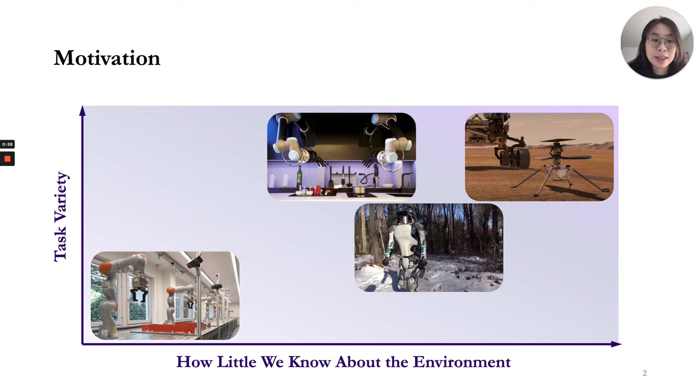Traditionally, modeling and control techniques have been used to solve robotics problems. They usually require us to derive a first principle model and then come up with a controller that has desirable theoretical properties. However, as the environment becomes less structured, it becomes increasingly hard to find an accurate model as well as designing a good controller.

Data-driven methods, on the other hand, seem to be a powerful alternative in this setting, as they usually make weak modeling assumptions. Moreover, they can also improve their performance as they collect more data.

However, it is still unrealistic to directly apply these data-driven methods into robotics problems due to a number of concerns. For example, it is hard to have any safety guarantees during learning and after learning. It requires a lot of data, the learned policy is hard to interpret, and the learned policy can often exploit the environment, such as the reward function.

In most of the previous work on learning robot policies, people often use fully connected neural networks to parameterize the mapping from state to action, namely the policy. On one hand, these fully connected neural networks are powerful because they are universal function approximators. However, this also means that they're extremely inefficient, both in terms of samples, parameters, etc.

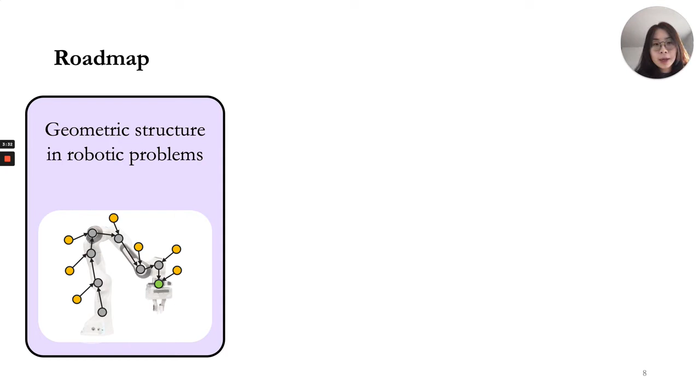In this talk, I will first talk about the geometric structure commonly existing in robotics problems. A large part of it is introduced by the kinematics of the robot. Next, we will look into more complicated robotics problems, which involve multiple objectives. And finally, we will see how we can leverage such structure to enable safe and efficient robot learning.

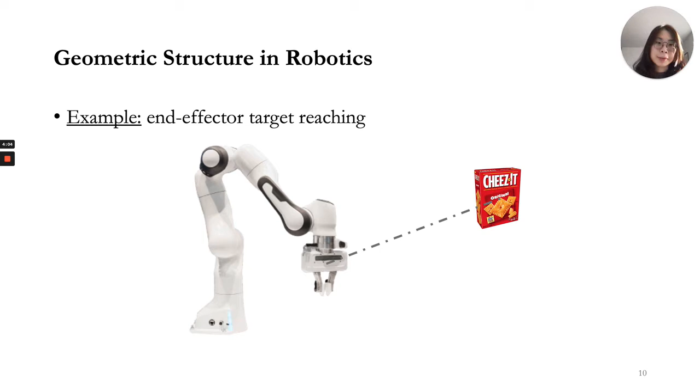Let's now focus on the first part, which answers the question of what kind of structure exists in robotics problems. To start with, let's consider this example where we want this robot manipulator to reach our target. We know that we can move this robot by changing its joint angles.

Here in this example, this Franka robot manipulator has 7 joints. These 7 joints uniquely determine the configuration of the robot. Therefore, we call this 7 degrees of freedom joint angle vector the configuration space coordinates.

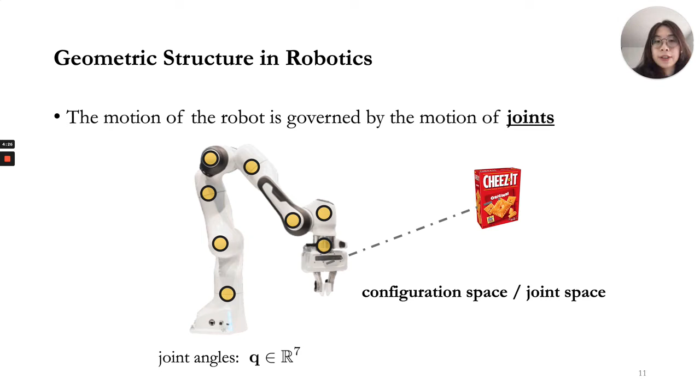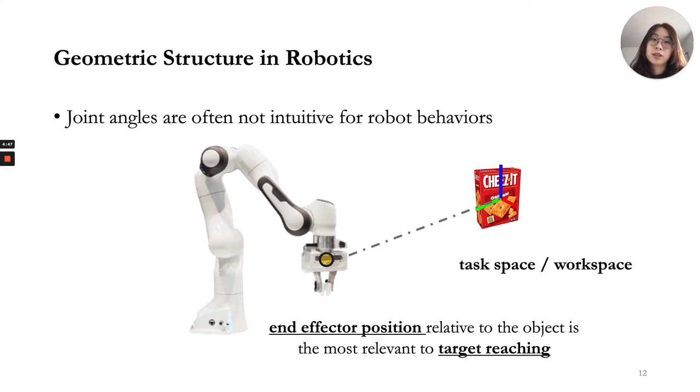However, it is oftentimes not at all intuitive to consider robot motions in the configuration space. In many cases, it's often easier to consider the motion of points on the robot body. For example, the end-effector's position relative to the object is the most relevant to the target reaching task. As another example, for obstacle avoidance, what's perhaps more relevant is the distance between the points along the robot body and the obstacle.

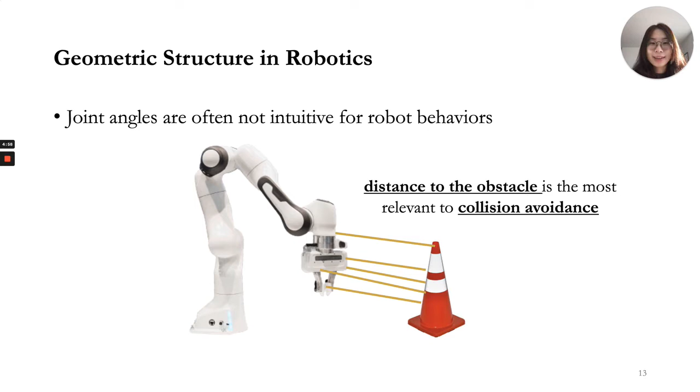The kinematics of the robot is a function that translates what is going on in the configuration space, where we can actually move the robot, into what is going on in the space which we really care about, which in this case is the end-effector position.

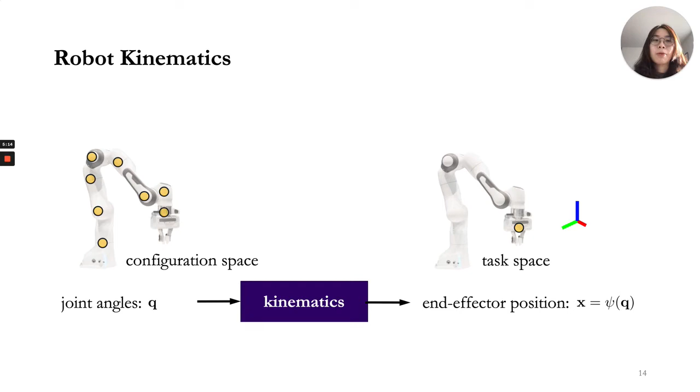Now let's take a deeper look into the kinematics function of the robot, as it fundamentally determines the geometric structure of the robotics problem. The input of the robot kinematics is the joint angles and a base pose, which is the position and orientation of the robot base.

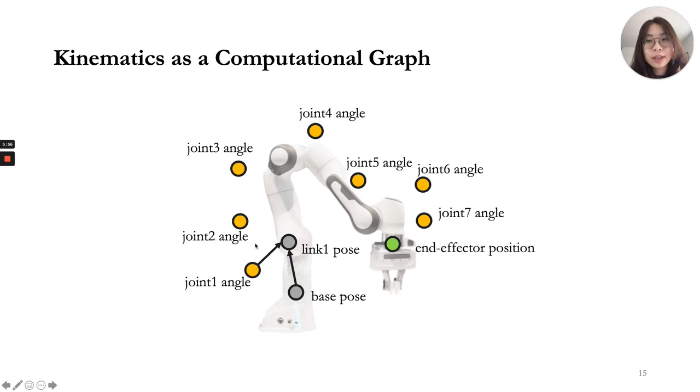Our goal of the robot kinematics is to compute the end-effector position. Based on this base position and the angle of joint 1, we are able to compute the pose of link 1 or any points on this link. Then with that and joint 2 angle, we can compute similarly the pose of link 2, and so on and so forth, all the way to the end effector.

If you're a deep learning person, it may be easier to think about this robot kinematics as a chain of layers. Each layer corresponds to a rigid body transformation, which is determined by, for example, the length of the link and where the joints are located. In fact, we can implement all of these in automatic differentiation libraries like TensorFlow or PyTorch.

So abstractly speaking, we can consider this forward kinematics as nothing but a module that potentially lives in automatic differentiation libraries. As we saw on the previous slide, this module contains a chain of rigid body transformation layers.

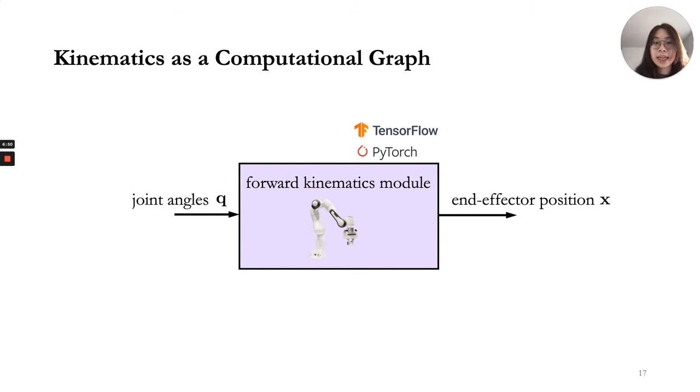Because we care about the motion of the robot rather than just a static configuration, it is important to understand how to translate joint velocity and acceleration into end-effector space. For velocity, this is given by differentiating through the kinematics.

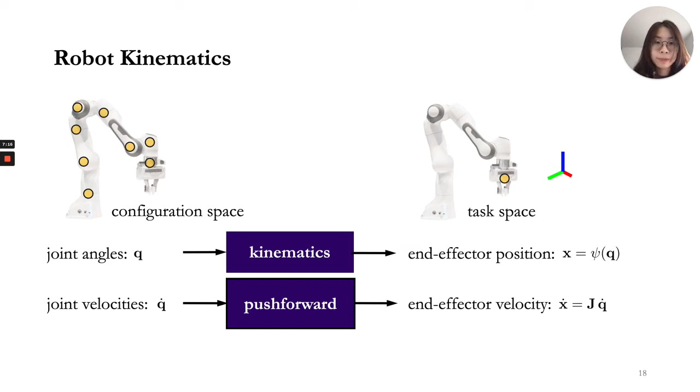This operation, in geometric terminology, is called push forward. We can further compute the end effector acceleration by taking second-order time derivatives.

If we actually implement this forward kinematics module in auto-diff libraries, we notice that these automatic differentiation tools provide us with very powerful APIs for dealing with the geometric structure of robotics problems.

For example, if we want to compute the end effector velocity, we need to implement originally this push-forward operator, and the closed-form solution for this push-forward operator can be quite hairy because the kinematics itself is pretty complicated.

However, if we implement the forward kinematics within the auto-diff libraries, this push-forward operator can now be efficiently implemented by just a single call to the Jacobian Vector Product API, or JVP, which is naturally and natively supported by auto-diff libraries. We can do similar things for end effector acceleration.

In this case, we need to make a couple of more calls to the JVP function.

So to summarize this part of the talk, we see that robot kinematics provide the geometric structure of many robotics problems. We can think of the forward kinematics of the robot as a module that consists of a chain of rigid body transformation layers.

By using auto-diff APIs, we can easily translate the motion of the robot in the configuration space into the task space.

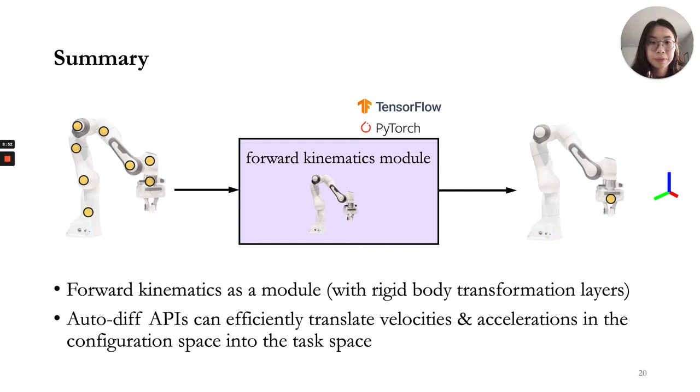With that, let's now look into how we can make use of the geometric structure in complicated multi-objective robotic tasks.

Let's consider the same Franka robot that we saw in the previous example, but now we not only want the robot to reach the target, but we also need to avoid collision with obstacles in the environment, and furthermore, we may want the joint angles to stay within the joint limits.

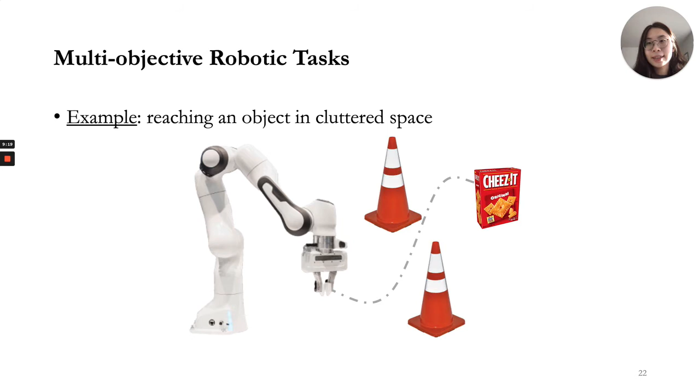For these types of multi-objective tasks, we could potentially generate policies from scratch. For example, we can use different types of planning methods, such as searching or trajectory optimization. We can also use reinforcement learning to learn a good policy.

This, to me, looks a lot like trying to make a sculpture out of clay. You can end up with an extremely delicate, potentially optimal policy. However, the entire process requires a lot of time and a lot of computation.

Moreover, if we are handed a different task, we probably need to go back to the clay and start from the very beginning. And as the saying goes, don't let perfect be the enemy of good. This motivates us to look at something very different.

The policies that we're going to look at for the rest of this talk are something more like Lego blocks. Of course, there's only a certain level of resolution that you can get to with these Lego policies, meaning that we will likely get something that's suboptimal.

However, each of the single Lego blocks is simple and composable. Once you're handed a new task, you can quickly find a few pieces from your library and come up with something reasonable. This means that these policies are reusable. Moreover, since you can find and assemble these policies so quickly, you can also have a reactive policy.

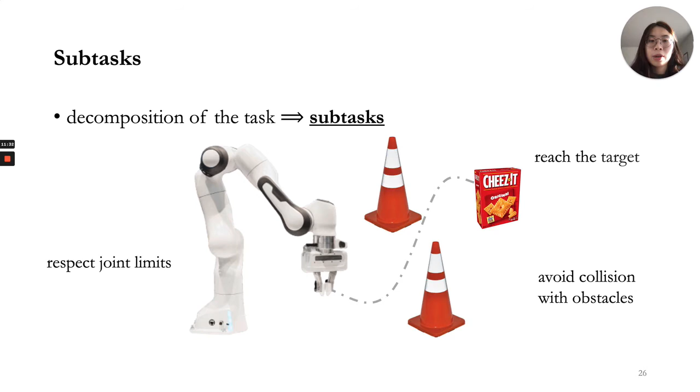Going back to this example of target reaching in cluttered space, we can decompose this problem into a few simpler ones, which gives us the notion of subtasks. One subtask, for example, could be just target reaching without worrying about the obstacles, which is the same as the one we saw earlier. We can have another one that only considers avoiding obstacles. We could have another one that deals with joint limits.

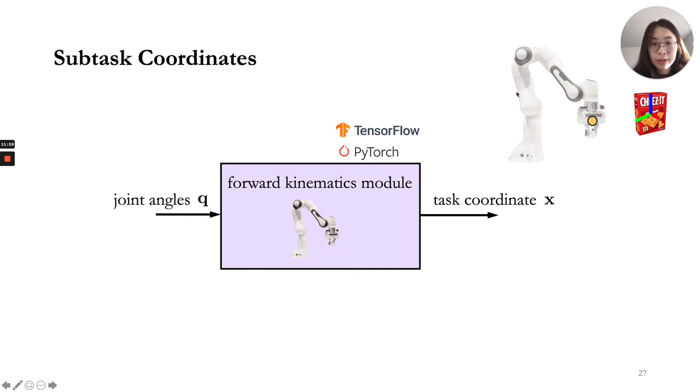Recall that in the first part of this talk, we have this forward kinematics module that allows us to compute the task coordinate, which in the previous example was the end effector position. Now, since we have multiple subtasks, each of them can have their own subtask space. For example, the end effector position is more important for target reaching, but the distance between many points on the robot and the obstacle is perhaps very relevant for collision avoidance.

Therefore, we now have a forward kinematics module that outputs not just one, but many subtask coordinates. It could be end effector position, it could be distance between the robot and an obstacle. It could also just be the joint angles, since it is useful for handling joint limits.

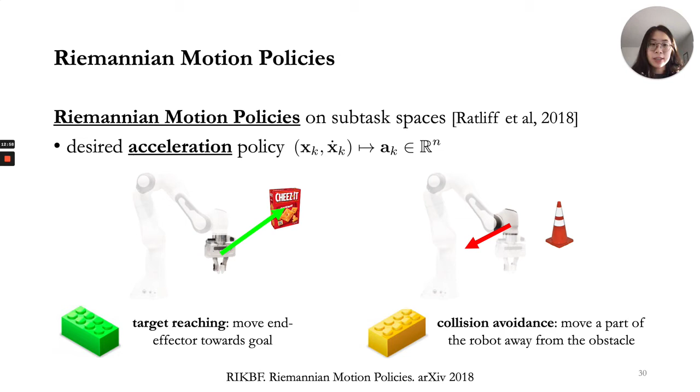With that, we can finally talk about what these subtask policies for Lego pieces look like. We describe each subtask policy as a Riemannian motion policy that lives in its own subtask space. Each RMP consists of two parts. First, there is a desired acceleration policy. For target reaching, we can imagine this Lego policy pushes the end effector toward the target. For collision avoidance, we can have each Lego policy push a part of the robot away from the obstacle.

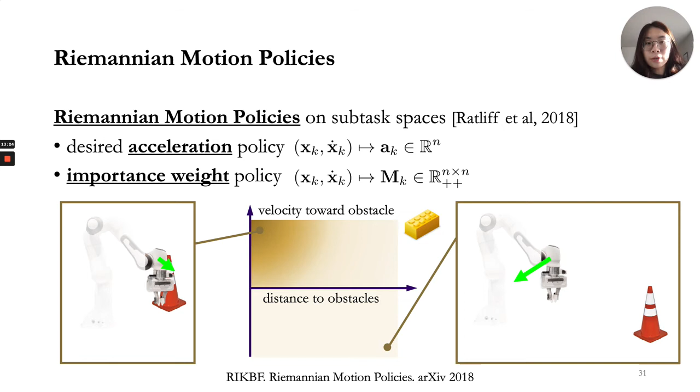The second part of an RMP is an importance weight policy, which is a matrix-valued function that characterizes the trade-off between subtasks. For example, when the robot is close to an obstacle and moving towards it, the importance weight of the collision avoidance policy should be high enough, while the weight should be close to zero when the obstacle is far away from the robot and the robot is moving away from it.

Therefore, we now know that each Lego piece policy is an RMP that lives on its subtask space. We can now look into how we can put these Lego piece policies together to get an actual joint configuration space policy that we can actually execute.

As we talked about earlier, we have Lego piece policies living under their corresponding spaces. For example, we have a target reaching policy acting on the end effector space of the robot. We can put collision avoidance policies along the body of the robot. Finally, for each joint, we can have a joint limit policy.

With these, we can use an algorithm called RMPflow to put these Lego piece policies on different spaces together, and this gives us a joint space acceleration policy, which can be actually executed on the robot.

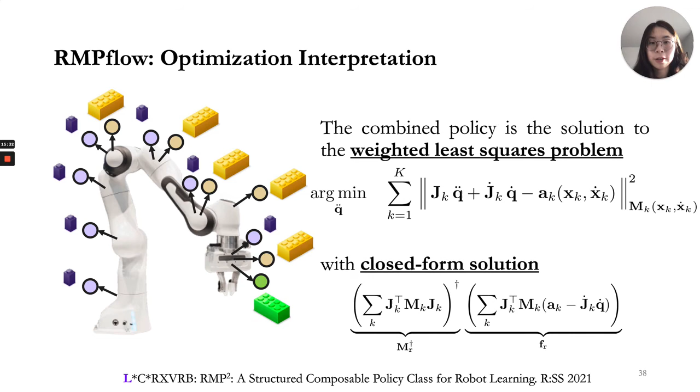Furthermore, we observe that this optimization problem has a closed-form solution, which is given right here. It turns out that we can also compute this closed-form solution efficiently using automatic-differentiation libraries.

If you're familiar with differential geometry, this configuration space M and F are closely related to the pullback operator in differential geometry. This means that we can consider this RMP squared module, or the RMPflow algorithm overall, as a module living in auto-diff libraries. It contains the forward kinematics submodule and also each of the subtask RMP submodules.

We show that the combined policy by this RMP squared module with the RMPflow algorithm is stable as long as each subtask policy satisfies a certain control Lyapunov condition. This stability can also provide safety guarantees to the system with properly designed, for example, collision avoidance RMPs.

As a quick summary, we use RMPs as Lego pieces for policies, and we use this RMP squared module implemented in auto-diff libraries to put them together into a policy that we need.

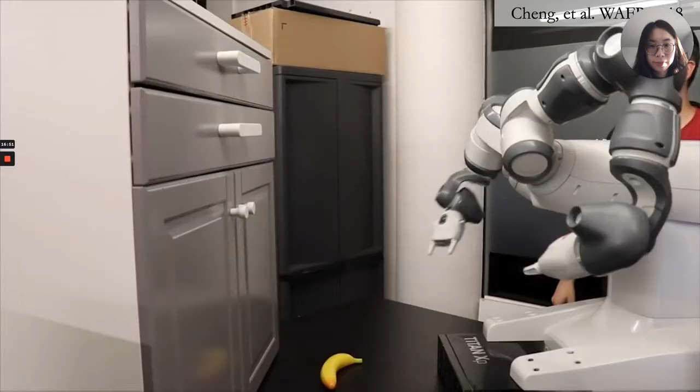This RMP framework has been applied to a wide range of robotic systems. This is a demo from the original RMPflow paper, where the RMPflow policy is used to control a dual-arm manipulator to open a drawer and put an object inside.

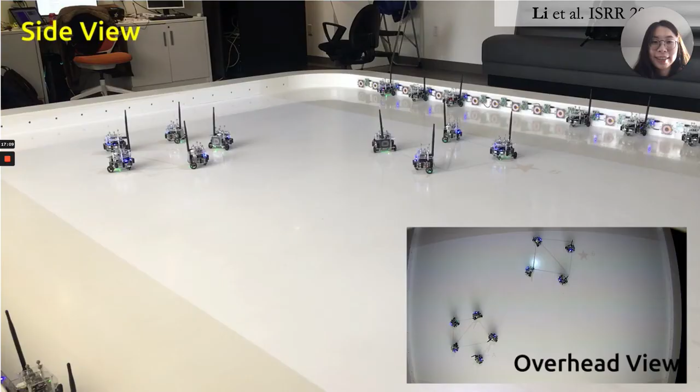In one of our papers, we also managed to use this RMPflow policy to control a multi-robot system, where two teams are tasked with moving and maintaining their corresponding formations while avoiding collisions with other robots.

As a quick summary for this part of the talk, we can tackle multi-objective robotic tasks using modular composable policies. Furthermore, we can use this RMP squared module, implemented using Auto-diff APIs, to combine these composable policies together into a configuration policy, and we can combine them in a geometrically consistent manner.

With that, we can finally switch gears and look into how we can leverage this RMP squared policy class to enable safe and efficient robot learning.

In existing work on robot learning, fully connected neural networks are often used to parameterize the policy. As we talked about at the very beginning, fully connected networks are fundamentally inefficient. So what we decide to do here is use this RMP squared module instead to represent the policy, because this RMP squared module naturally encodes the geometric structure of robotics problems and can provide nice theoretical guarantees.

To enable learning, we need to think about what can be learned or parameterized within an RMP squared module. First, we can parameterize these Lego policies, namely subtask policies, which involves parameterizing an acceleration policy and the importance weight policy. Perhaps less obviously, remember that each Lego piece lives in its own subtask space. This means we can also parameterize the forward kinematics module so that we can find a more efficient task coordinate. Let's first look at parameterizing RMPs.

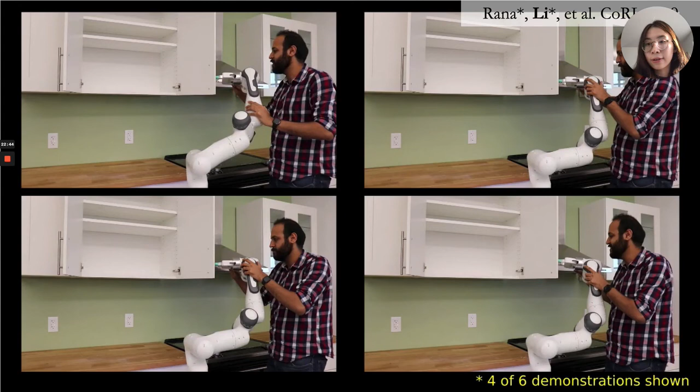In this example, we have a human, our collaborator Asif, teaching the robot how to go around the cabinet door to reach the handle of the cabinet door. During skill reproduction, we altered the configuration of the cabinet door—some open, some pretty much closed—and we can see that this robot can still generalize and achieve the task.

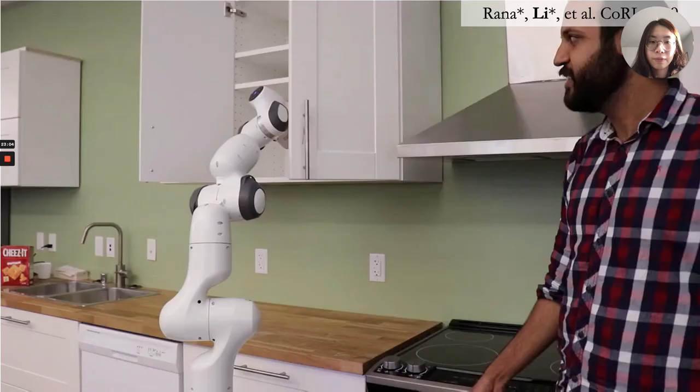To demonstrate this feature even further, we can even move the cabinet door in the middle of the execution, and we can see that the robot can immediately adapt to this change and achieve the task.

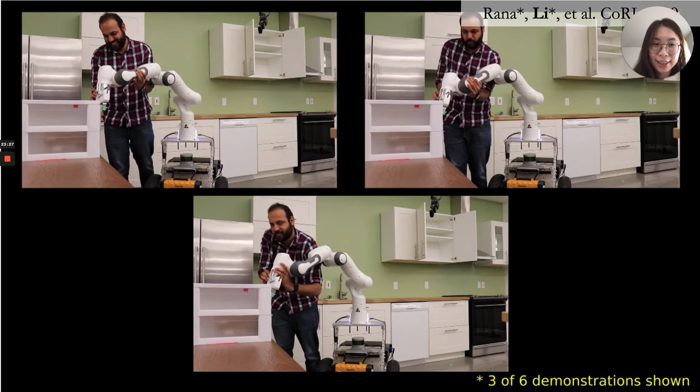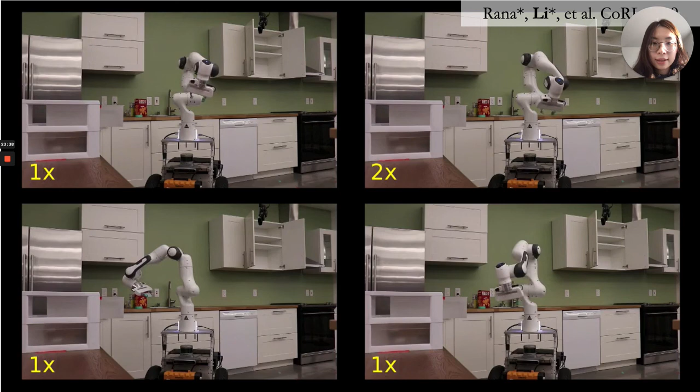Here's another example where we have a human, again our collaborator Asif, teaching the robot to close the drawer. During reproduction, we start the robot with very different initial configurations, and we see that the robot is able to achieve the task from all of the initial configurations, although for the upper right case, the robot takes a little longer because the initialization is far away from any demonstrations.

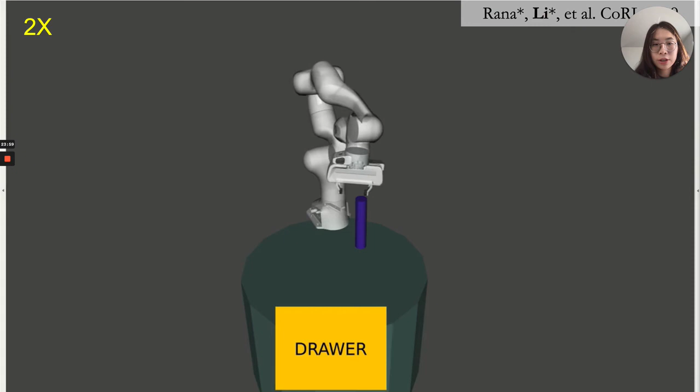Another feature of this RMP squared module is that we can use the learned subtask policy and combine it with other hand-designed policies during test time.

This is still from the drawer closing task, but now in simulation, and we have also added an additional obstacle in the way of the robot. We see that the robot can automatically adapt to it without any further learning.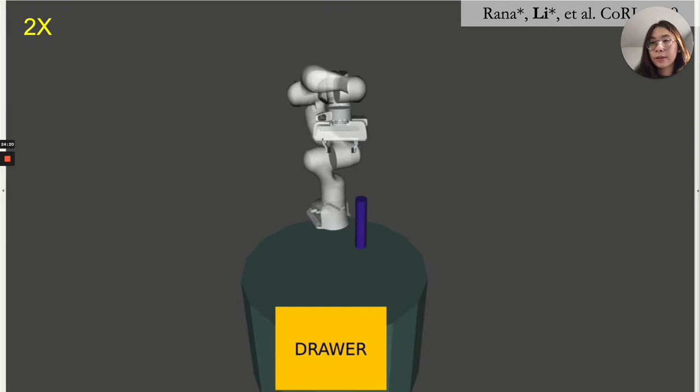Next, we will look into how reinforcement learning can benefit from this RMP squared policy. Reinforcement learning has recently shown great success, especially in games. However, there are still great difficulties in directly applying them to robotics due to concerns on, for example, safety and sample efficiency. We hope that learning with the structured RMPflow policy can mitigate some of the limitations of RL.

We train two types of policies for this task. The first is a direct, fully connected neural network mapping from state to action—I'll refer to this as NN for the next couple of slides. The other is an RMPflow policy, which consists of a learnable target-reaching RMP and hand-designed collision avoidance RMPs and joint limit RMPs.

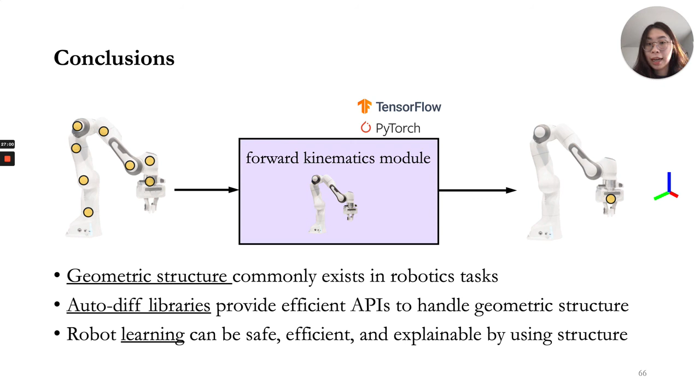As a summary of this talk, we have seen that geometric structure commonly exists in robotics problems. Although the math behind it is quite technical, we can make use of modern auto-diff libraries to easily handle such geometric structure. We also see that by using such structure, we can make robot learning safe, efficient, and explainable.